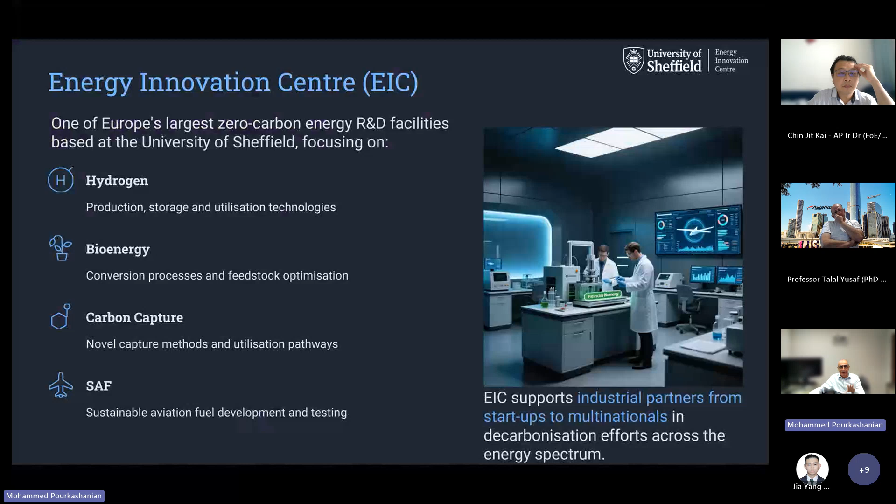What is the Energy Innovation Centre focused on? Rather than showing this diagram in order to meet my 15 minutes, let me tell you what we do. The pictures and photos show part of our activity and facilities. We have bioenergy facilities including waste to energy, biomass, and we also have a gasifier - a wooden gasifier. These are at pilot scale level.

We have a biogas turbine that works with biogas or hydrogen. We also have a marine engine that operates with bioenergy, as well as combustion test facilities operating with hydrogen, normal fuel, and even biogas.

In addition, we have carbon capture technologies involved, next generation technology like a molten carbonate fuel cell, amine capture plant, rotating packed bed, as well as direct air capture. Overall, we capture around 2.5 tons per day of CO2 when a few of these items work together.

Plus we also produce hydrogen from an electrolyzer. As you can see, we have all the components for SAF production - SAF produced from CO2 and hydrogen, or from syngas and hydrogen, using a Fischer-Tropsch pilot plant, which produces around 200 liters a day.

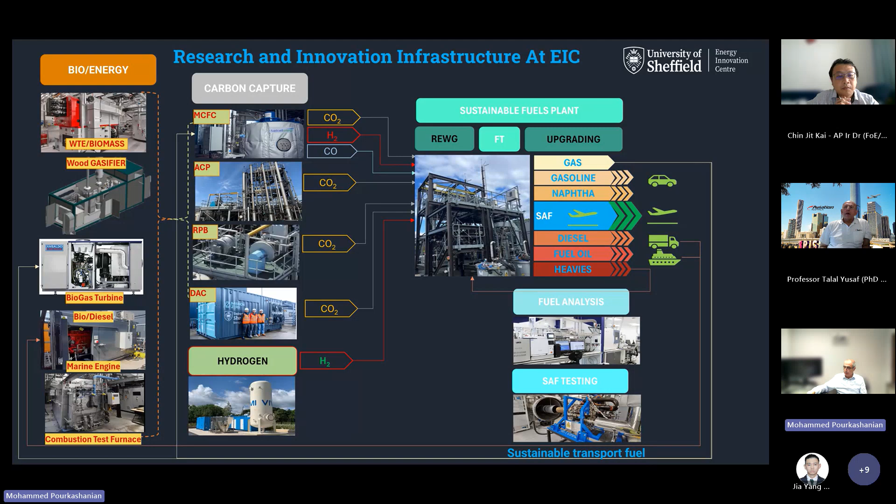Then the fuel produced from that goes into the fuel analysis lab, part of our contribution to the UK SAF clearinghouse. We also have an aircraft engine, an APU engine, where we test the performance of these fuels. This is our next generation technology that has received funding.

It reduces the cost of hydrogen, the SAF production, by around 40% using this technology. We will provide more information on this if there are any questions.

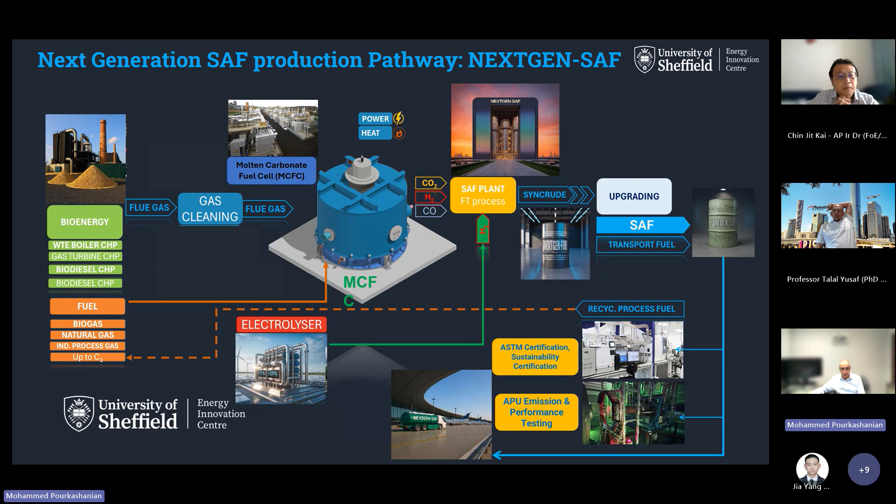Our work with industry - we work very closely with industry. We did all the tests for Flight 100. You may know about this flight - it took off from London to New York in 2023, November 2023.

We used 100% SAF in both engines and looked at the performance of the engine. Some of the results obtained from that are shown here. We tested that fuel in our lab using laser diagnostic facilities, and what is interesting to see is the output, shown on the left-hand side of the picture, of the particulate emissions.

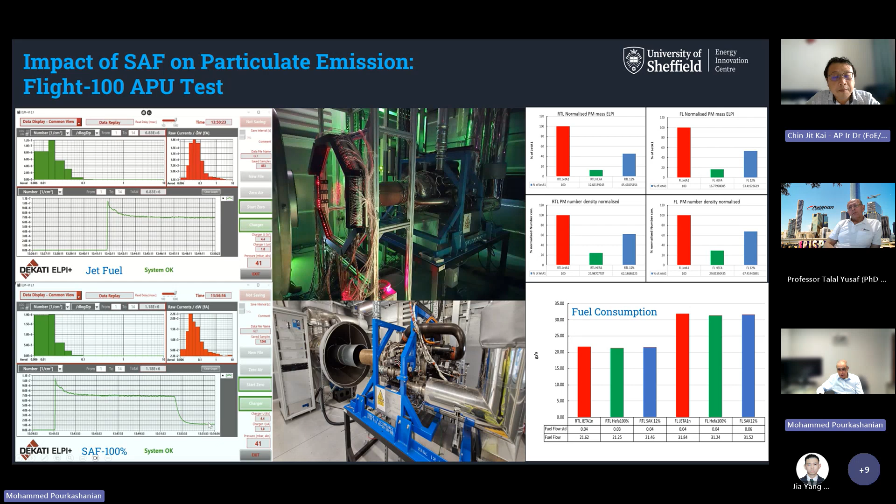And if you look at the bottom section of the jet fuel system, you can see that emissions generated from conventional aviation fuel, when we introduced SAF, show a significant drop, around 70% by mass or 40% by particle number density, a significant reduction when SAF was introduced.

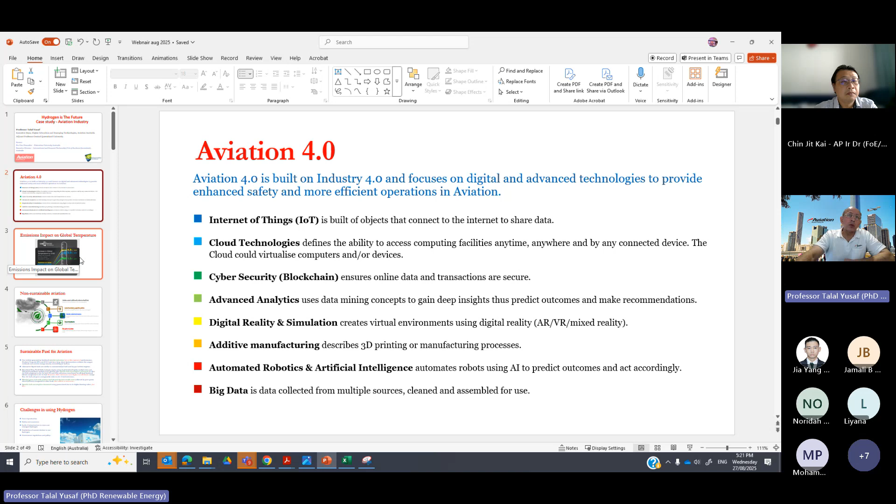We have a nice project to share with colleagues here, and this project is on hydrogen for the aviation industry. To me, hydrogen is the most ideal alternative fuel for aviation, besides SAF of course, because it contributes to reducing emissions significantly. As we all know, H2 plus O2 gives you H2O. Temperature is increasing and we need solutions, of course.

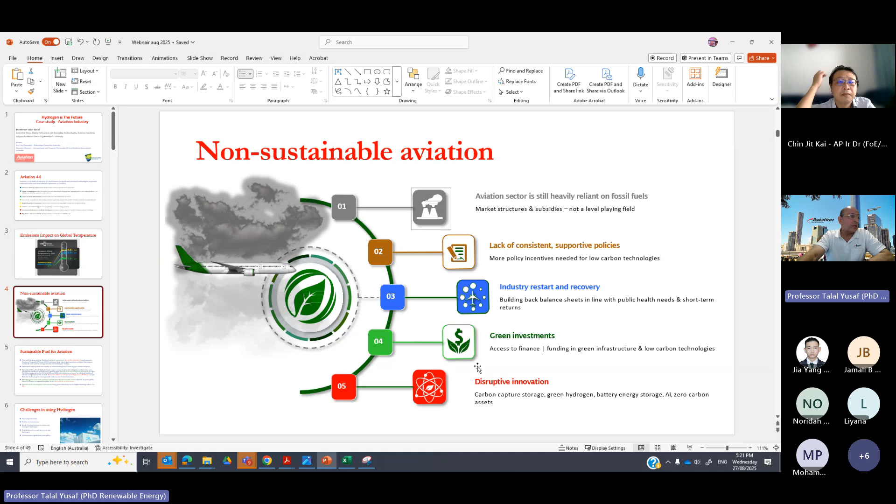I also wanted to share with you the generations 1, 2, 3, 4 of the aviation industry, and where we're at now with Aviation 4.0. I've done work for my government about Aviation 4.0 and where we're at using the technology.

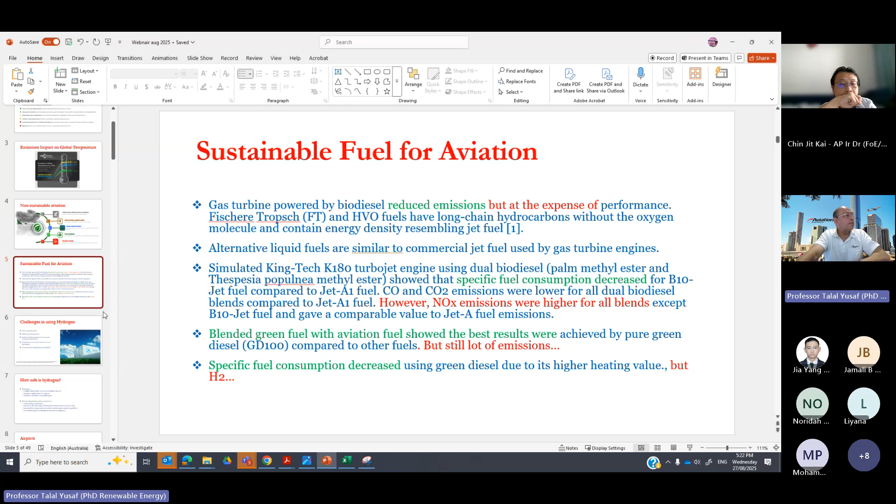Sustainable fuel and sustainable aviation, or SAF, has plus and minus, as everyone knows. I'll quote here a statement from my PhD student: we're solving the problem, but we still produce a little bit of oxides of nitrogen, CO, and CO2, and so on. So with liquid fuel, I think we still produce a little bit of exhaust gas emissions that need to be addressed.

Because of that, I have a very young, strong team who are not academic at all - they're all engineers and pilots. They come and speak to me, I give them a hangar and one aircraft, and they start converting this aircraft to use hydrogen.

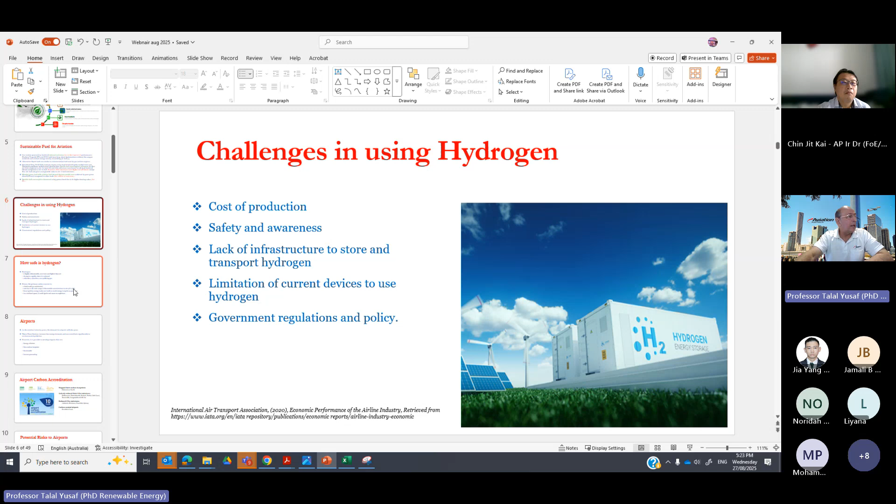So if I combine these together, we all need to work together, as mentioned previously, to tackle this problem and complement each other. The question is: is hydrogen safe or not? Again, everything is not safe when we started, but it becomes safe when it's up and running. That's why I feel hydrogen is safe. But we need to convince the regulators - we need to convince EASA, CASA, and CAA of Malaysia to tell them it is safe. Many reasons.

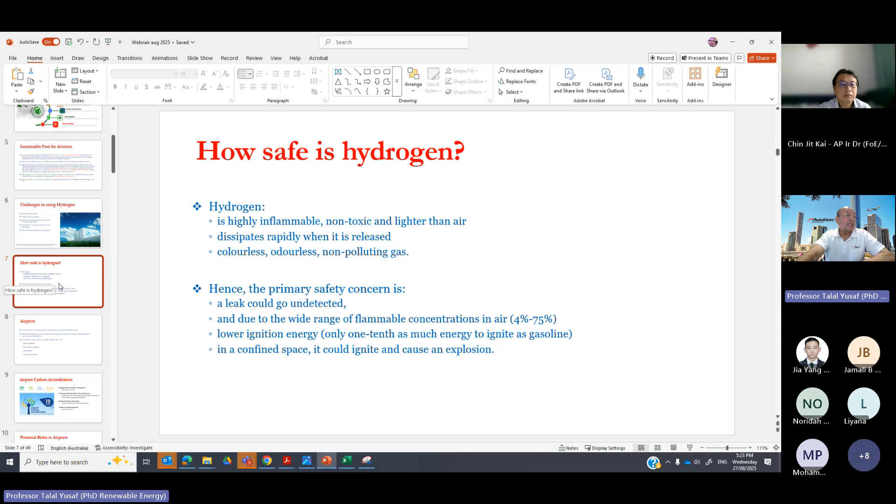I don't want to go through the technicality. Where we're at, Aviation Australia, and Australia in general, we use alternative or renewable energy resources for the airport. We have a few buses that operate on hydrogen, and we are also now producing green hydrogen.

By the way, I'm sure you know Australia produces a lot of brown hydrogen from coal and gray hydrogen from methane. But now I'm talking about green hydrogen - that's why it is expensive.

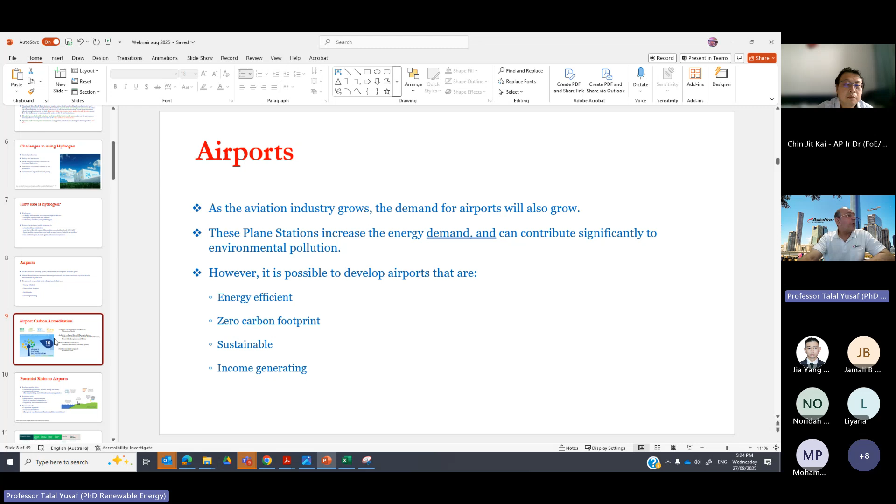Example: Adelaide Airport is now almost - they do a lot of decarbonization - but almost reaching the level where they reduce the emission dramatically.

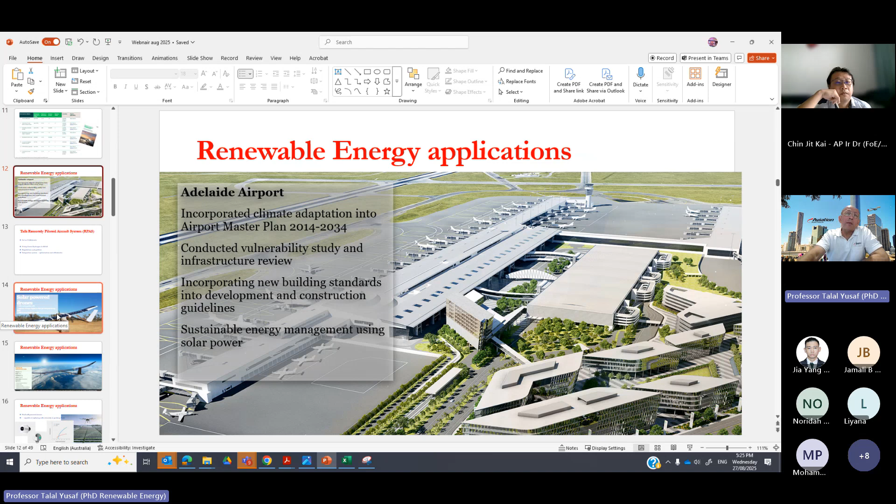Another area where Aviation Australia - we are about 25% of our business located in drone and drone technology. We train students and defense, and I think this year we've done, not me, Ryan, about 1,500 students, and we're certified by, we're licensed by the Queensland government, so we sign on behalf of the government.

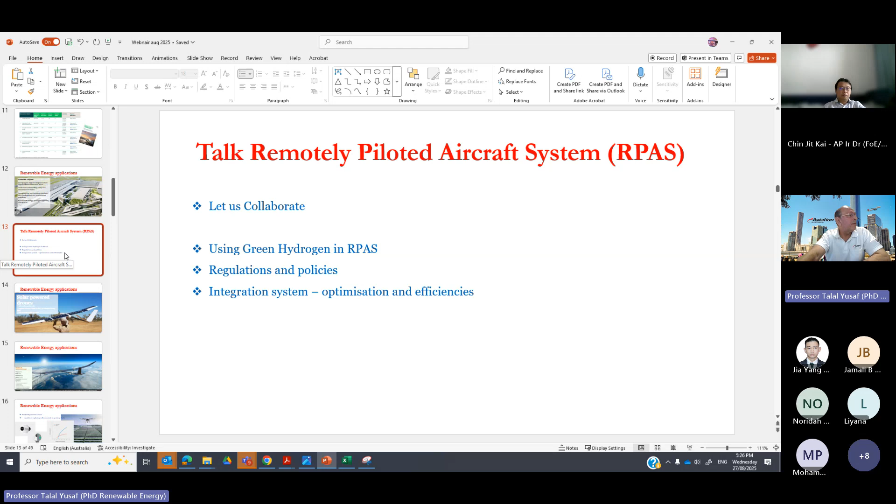We have about 5,500 students in Saudi as well, and in Malaysia we also have a very strong link. So again, since the drone is...

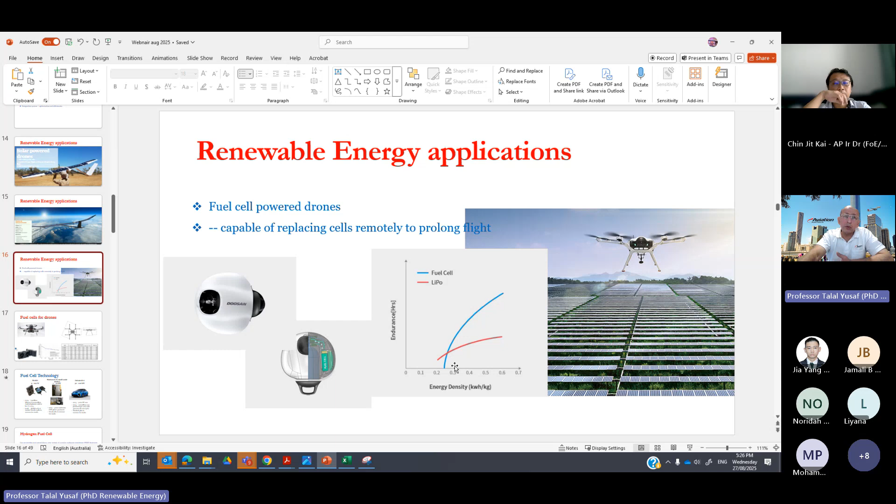Part of our business, Ryan and I decided to play with one drone and say, how about we convert this drone into hydrogen? As you can see, the blue color is the fuel cell, and it gives you a lot of endurance and also payload. So we demonstrate this to school students and universities. Some technical information about the drone is available here.

What is the source of green hydrogen, or what is the technology? The technology is electrolyzer, very basic. I've just had some discussion before this webinar, and I've been asked the question about whether we are going to produce green hydrogen, and the answer is we can buy electrolyzers from well-advanced countries who specialize in this, such as Japan, Germany, etc., instead of wasting our time.

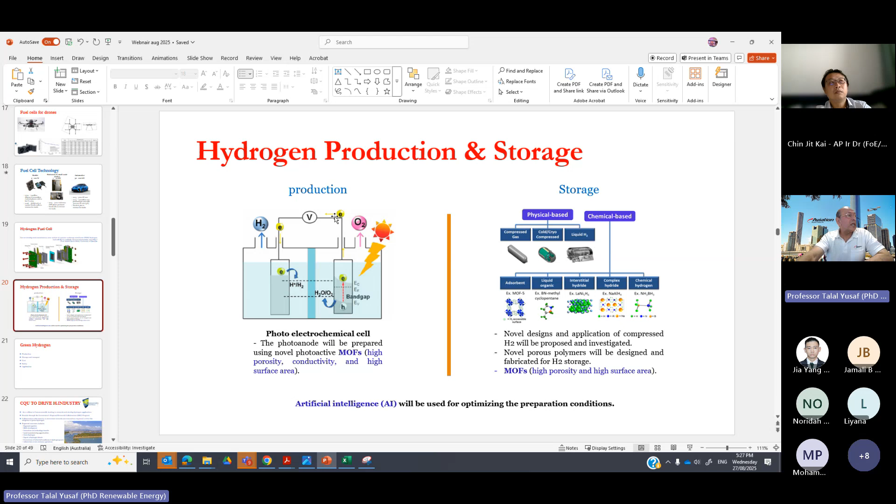And we're selling LNG and CNG to Japan, South Korea, and Taiwan. Now we're working - CQ, my university, Central Queensland - with the investor who's Andrew Forrest, a multi-millionaire, to pump 30% of the gas to be hydrogen. Again, this is something happening at CQU.

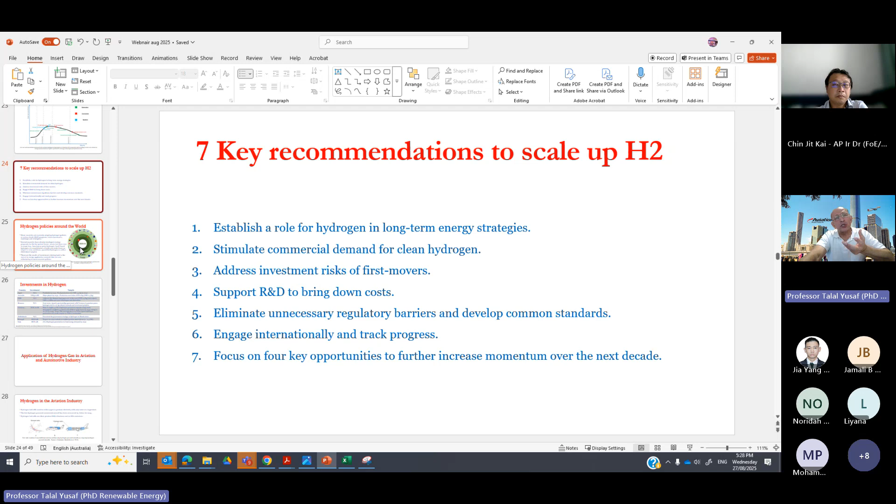I think the recommendation for hydrogen is we need to think long term. We need to do a little bit of commercial work, which is again something we are doing now - the risk of first mover, support R&D, and many other things. But in general, I think we really need to build awareness, and we need government support, which is happening so far in Australia. Of course, developing the technology, and we need to also graduate technologists who can deal with the technology.

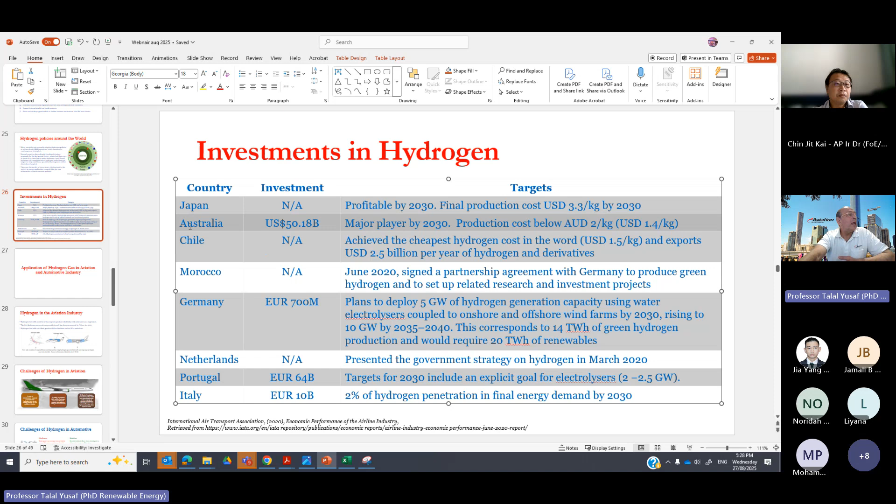The cost is high - we need to make it low. And here is the Australia cost of green hydrogen.

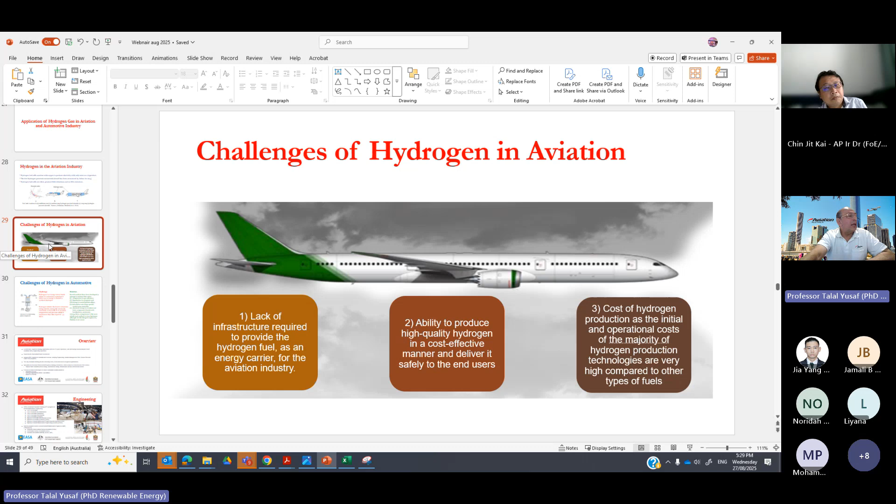We are now converting one aircraft, a Beech 1900, to use hydrogen as a fuel. We removed the gas turbine, and now we're doing a fuel cell, and it is happening. I will show you some photos at the last slide of this presentation.

We talk about challenges. This is my organization, and as I said, 4,000 strong. We graduate many maintenance engineers. We're part of CASA and EASA. We've got about a dozen aircraft, so we are very handy when it comes to aircraft, and we do a lot of certification, and sometimes it's important to think of certificates.

One of those short courses is hydrogen and hydrogen safety. The very last bit of this presentation is Stralis. Stralis is a commercial company led by Bob. Bob came to me 3-4 years ago, and we started discussing whether we could convert this aircraft to use hydrogen, and I was very supportive.

We gave him a hangar and a small jet, and they started playing with the aircraft and making a lot of progress, collecting donations, and now they are actually more than 50 staff members. They started with just a few, and now we have aircraft already operating on hydrogen, not yet flying.

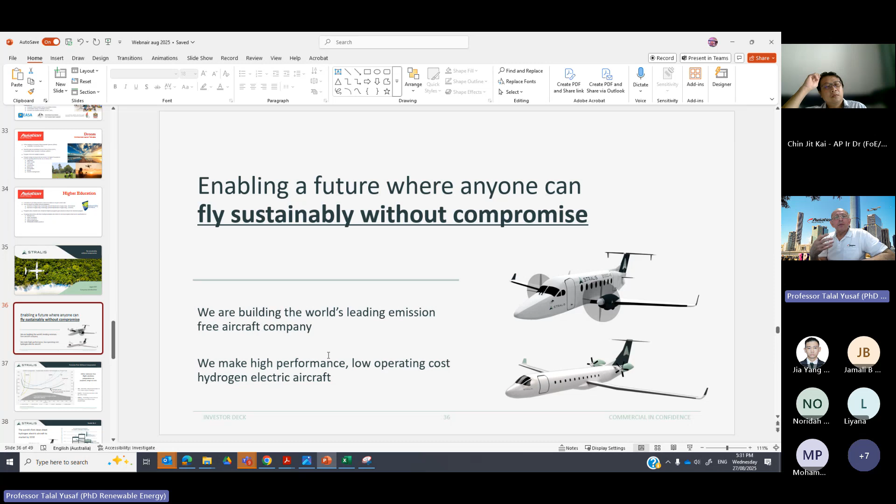Hopefully in 2026 we'll start the first trip from Brisbane to Gladstone, which is about 400 kilometers. Now they are very commercial, and that's why they wanted to produce the first aircraft by 2032, and it will be on the market.

And that's why, yep. Prof Talal, 9 minutes. Sorry? Sure. 9 minutes. Yeah, yep, but I think we still have time. Don't finish earlier. Yeah, okay, I'm trying to finish earlier, but anyway.

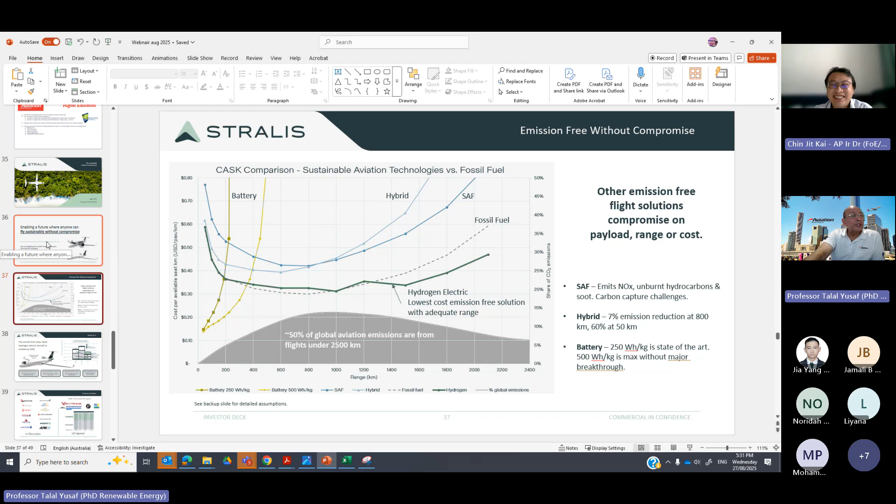So, in this case, I just wanted to talk about drones, if I have some time, because drones are another emerging technology device, and we're really doing a lot of work in drones, RPAS.

We're using this drone technology, but we realize we need longer durability, we need zero emission, and we need higher payload. That's why we start thinking seriously of converting this drone into hydrogen. This will also definitely contribute to building awareness in our kids, our students.

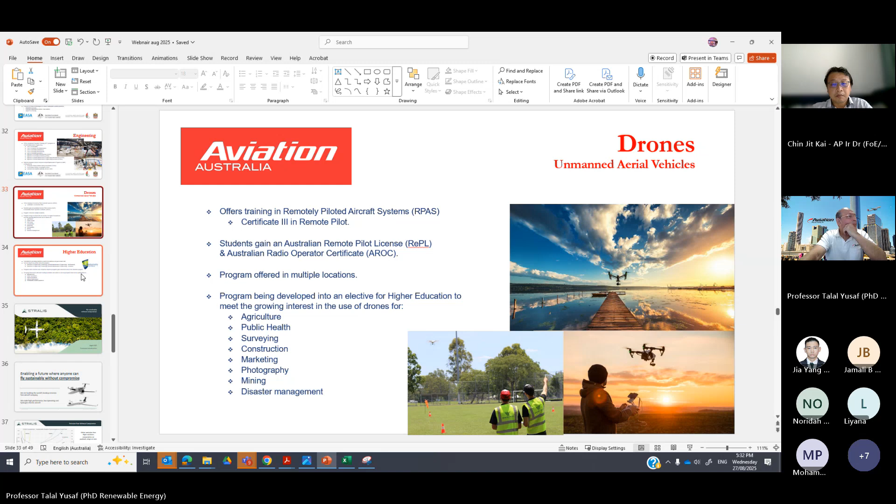For CQ and Aviation Australia, we partner together and we start developing what I called it when I presented this to the government. I said, now we graduate many technicians who can change the nozzle and jet and tire and all these things, and we call them B1, B2, A1, A2—these are maintenance technicians.

But with the new technology, we are now aiming to graduate what we call technologists. These technologists are not professional engineers—not 4 years, too much—but not also just 2 years. This is what we are aiming to do and achieve.

We successfully have 2 classrooms now, and hopefully we'll start graduating the first batch of students. Those students will be able to deal with the new technology, including hydrogen.

Stralis signed with a Japanese company last month to do more work, and Aviation Australia always comes to do the training. So we are going to train and graduate technologists who can deal with this technology, which is another important element we need to achieve.

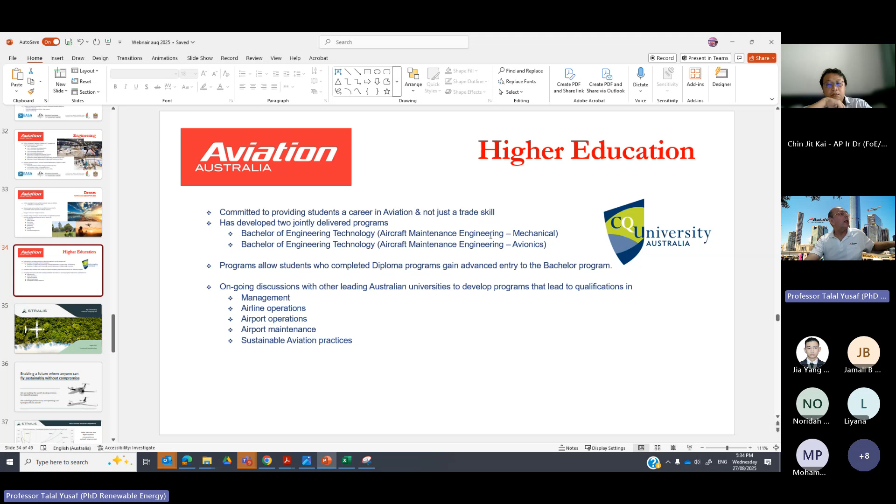Now, this is Stralis, and as I said, I really love them. They are very young, energetic guys—no PhD, no master's needed—they straight away jump to the aircraft and start making the conversion. They are very, very successful. They've been in the business for almost 4 years.

Hopefully by 2030, they want to do the first clean sheet hydrogen electrical aircraft, and they want to push it to the market. They've signed agreements with Qantas, Virgin, and Emirates, and so on and so forth.

Some technical information, which I don't want to spend more time on, but this is the target, and the sale—they're aiming for some sales of $1.3 billion by 2032. This is for 9 to 19 passenger Beech 1900 aircraft, but over time this will increase.

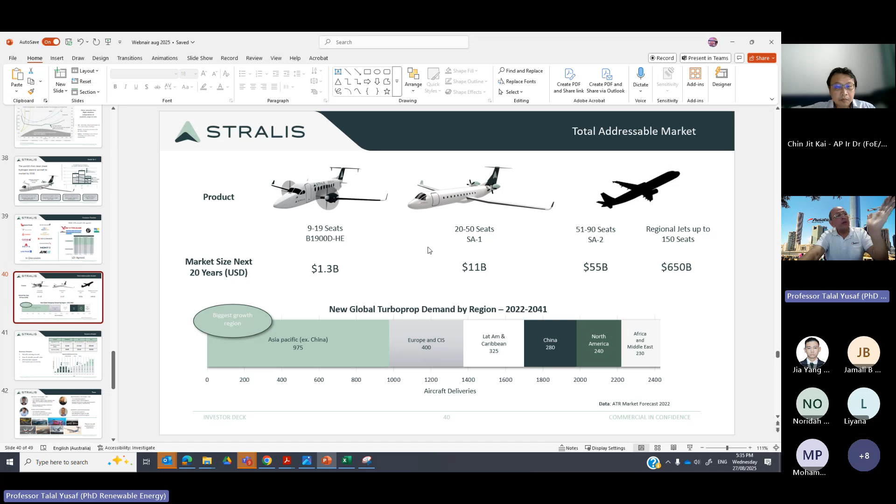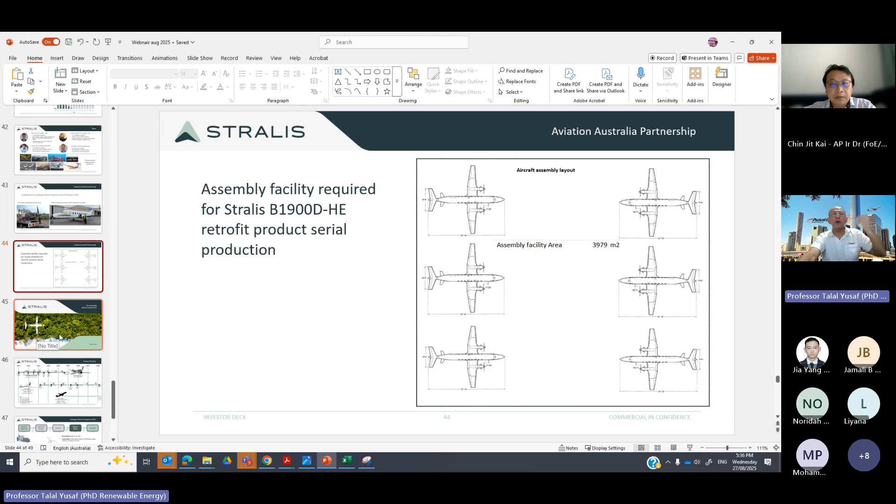I think with this I will stop, and I will open the floor if there's any discussion, or we wait for the following speaker. Thank you very much, colleagues.

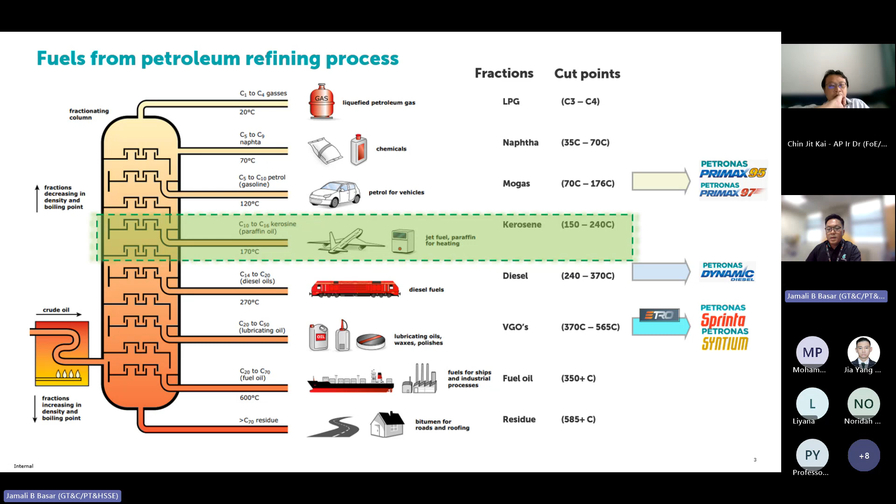So first, what is SAF? SAF is a sustainable aviation fuel, an alternative fuel made from non-petroleum feedstock, which based on our study can reduce up to 80% of the emission. And it is a drop-in fuel, because when we design SAF it should be compatible with the existing engine, so based on our pathways we can simply blend and drop in with the fuel.

Studies show that we can blend up to 50%. At the moment there are about 11 approved SAF pathways. There are two different versions: one is ASTM D7566, and another one is D1655. Later on I'll show you the difference.

So what is CORSIA? CORSIA simply means Carbon Offsetting and Reduction Scheme for International Aviation. It is to address carbon neutral growth from 2020. Imagine if we do not have SAF - it's anticipated that our emission will continue to grow, since aviation contributes about 2% of emission to the world. This is where CORSIA addresses how to manage the emission.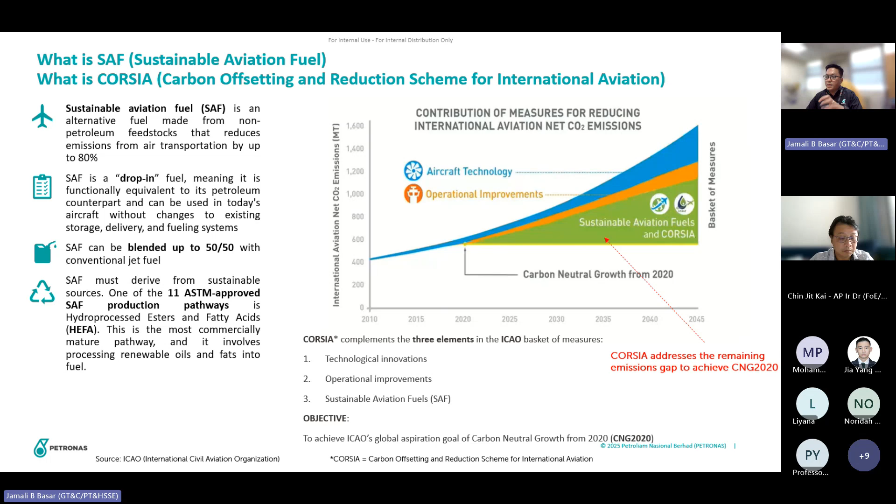As we move towards sustainability, as I said earlier, we have ground transport and also air transport. For ground transport we have electrification, so we expect the demand for gasoline may be a bit affected because of the rising trend of EVs, electric vehicles. But for aviation, we expect it to continue to grow.

This slide, the graph below, shows that the whole transportation industry collapsed during the pandemic. But after the pandemic, especially in the airline sector, we anticipate continued growth. We expect by 2025 or 2026 we should be able to recover to the level we achieved before the pandemic. The chart on the right tells about the SAF projects across the globe.

You can see that Europe has the most number of projects, about 58 projects. But in terms of capacity at the moment, the US is still the biggest, about 24 million tons per year.

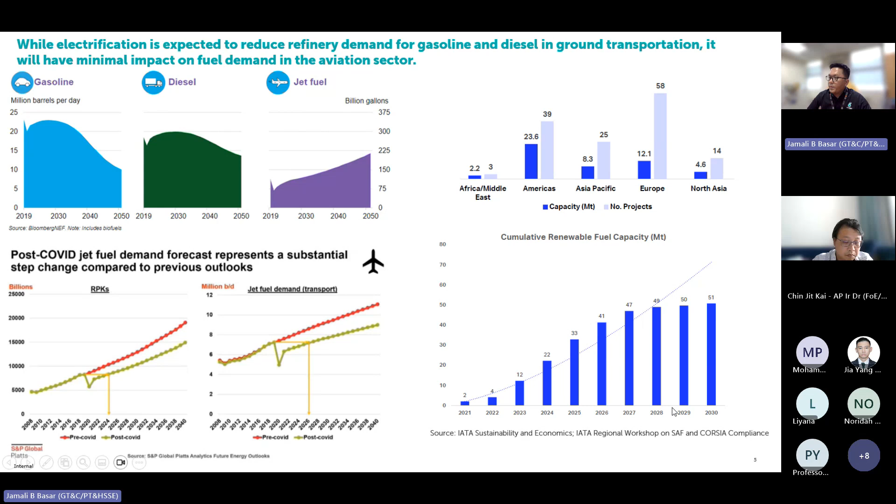Okay, next, what is a sustainable aviation fuel, which is SAF? So mainly the feedstock for use of SAF actually comes from waste feedstock. It can come from plant waste, used cooking oil, plastic waste, domestic waste, even algae, and also industrial waste can be used as our feedstock.

So the good thing about SAF basically is the CO2 that we use is absorbed by plants and then produces a waste, and then this waste we convert into SAF. The SAF then emits CO2, but over a lifetime, over time, this CO2 is what we call neutral. So this is where we foresee that SAF can be sustainable over a long time.

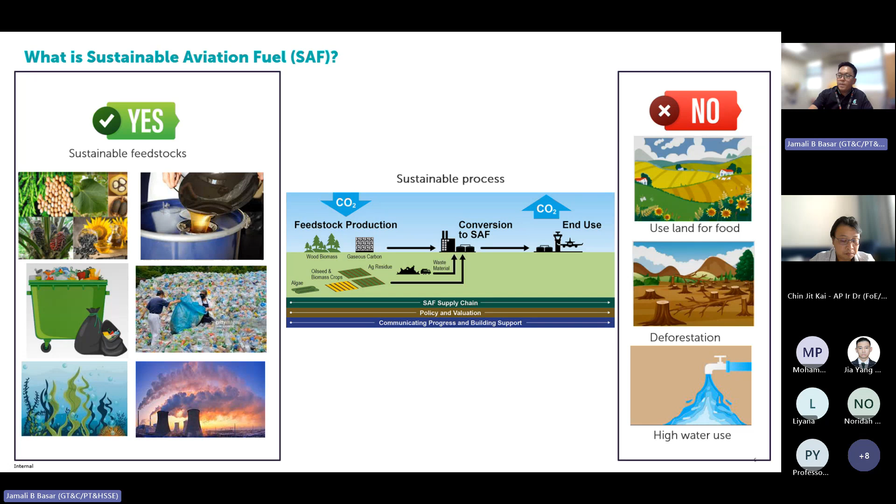So in order for us to do SAF, there is a standard or systematic approach to evaluate whether it can be SAF or not. According to ASTM D4054, this is the ASTM we use to evaluate how the SAF is made. So there are 3 different test programs.

The first one is what we call the test program, with 4 different tiers. The first is just to evaluate the critical properties of the SAF, whether it meets the typical jet fuel specification or not. Tier 2, fit for purpose, goes beyond that specification—we need to see the possible impact to the engine. If that is okay, then you go to the next tier, which is component or rig testing. Finally, tier 4 is where we need to test on the actual engine.

So in terms of fuel volume, for tier 1, it can be as low as 10 gallons. But as you go to higher tiers, the amount of fuel required is a lot more. Even for tier 4, it can be as high as 100,000 gallons, basically to test across the engine.

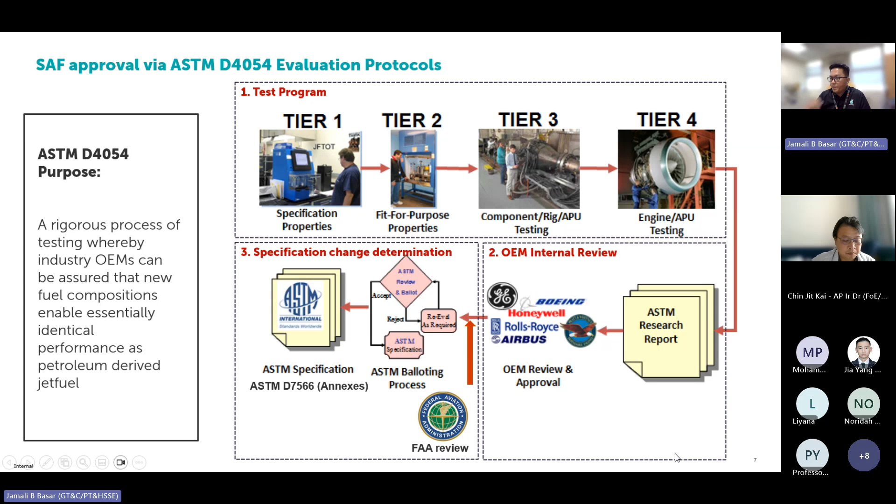Once you pass that program, you need to provide the report for OEM review. This is based on ASTM, and from there they will evaluate whether the one that you produce can meet the existing ASTM, which is ASTM D7566 or ASTM D1655, or it may require some new process which can be put under a new annex under this ASTM. After that, it completes the process.

So at the moment there are 11 pathways, but here I'll just show you 7 pathways under D7566. So basically from the right, the one that I talked about before is on the evaluation protocols, ASTM D4054. Once you meet that criteria, you need to see whether it can be mapped against the existing ASTM here, D7566. If it's a completely new process, it may be a new annex under this ASTM.

And for the remaining, basically for D1655, it tackles co-processing. Co-processing means whatever you have can simply be blended into the existing jet fuel for use.

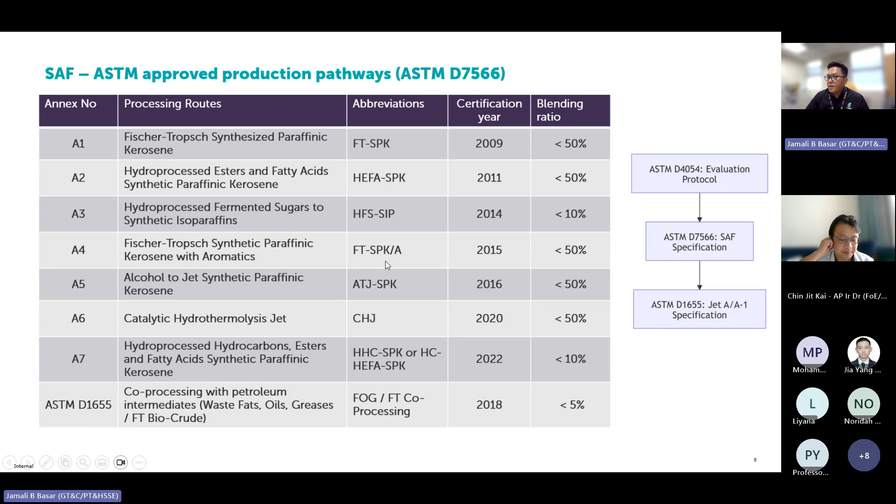Okay, so in general, this is the overall SAF processing route. In summary, as I said earlier, our feedstock has to come from waste. It can come from used cooking oil, animal fats which we call tallow, or from other waste. Depending on the feedstock, it will dictate how the process should be to make SAF. So in general, there are 3 categories.

The first one is through lipid conversion, where the lipid comes from UCO especially, and also animal fat. This is where we call the process HEFA, under A2. Then for biochemical, this tackles organic waste, where you convert it into sugar, then into alcohol, and finally into jet fuel.

So this is under the associated pathway called ATJ, alcohol to jet, under A5, and also A3. Or sometimes we call it SIP, for sugar to synthetic isoparaffin.

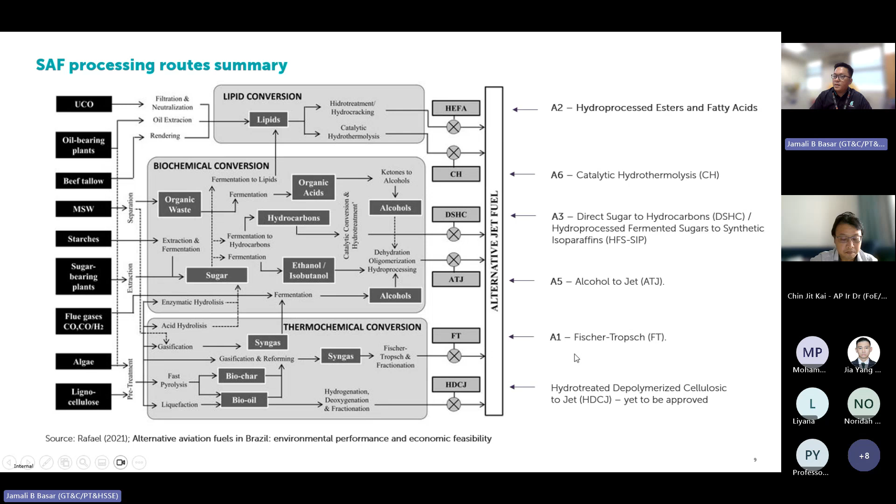So for jet fuel, this is a typical composition of jet fuel from the traditional process. In order for you to make SAF compatible with existing fuel, you need to make sure you have almost the same composition of that material. So you need to have paraffin.

Ideally, you need to have all of it - paraffin, isoparaffin, naphthene, and also aromatic. Aromatic is still quite important in fuel, basically for seal compatibility, for seal swelling.

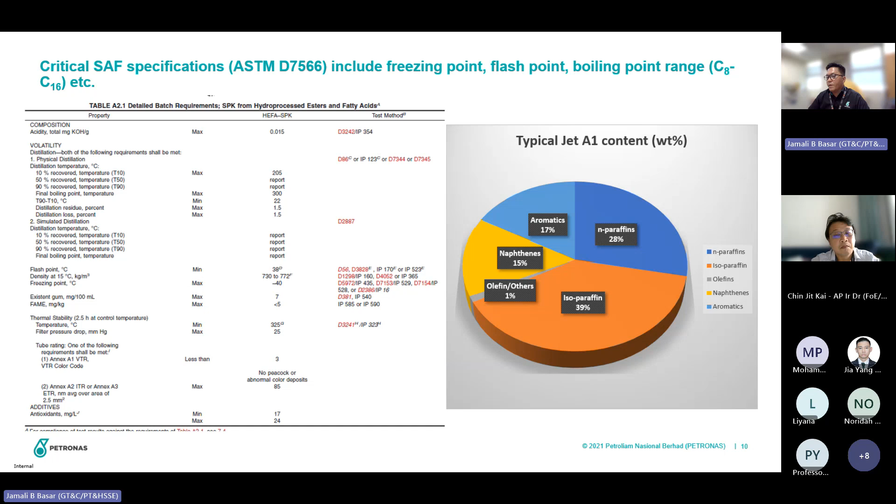So then I'll talk about CORSIA. At the moment we are in the first phase of the implementation. We are targeting by 2027, all participating countries will use CORSIA, will use SAF basically to address the emission.

In order to make sure that the SAF is compatible, the right method to confirm its sustainability is through a life cycle analysis. So in general, whatever you process, you need to calculate the LCA across the whole chain from feedstock cultivation all the way until fuel combustion, and calculate what is the emission. We need to benchmark with the normal jet fuel, which has about 89 CO2.

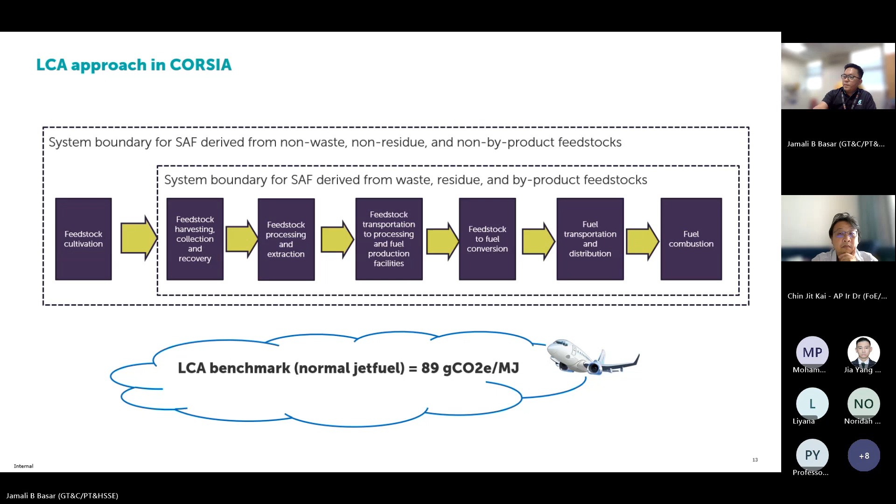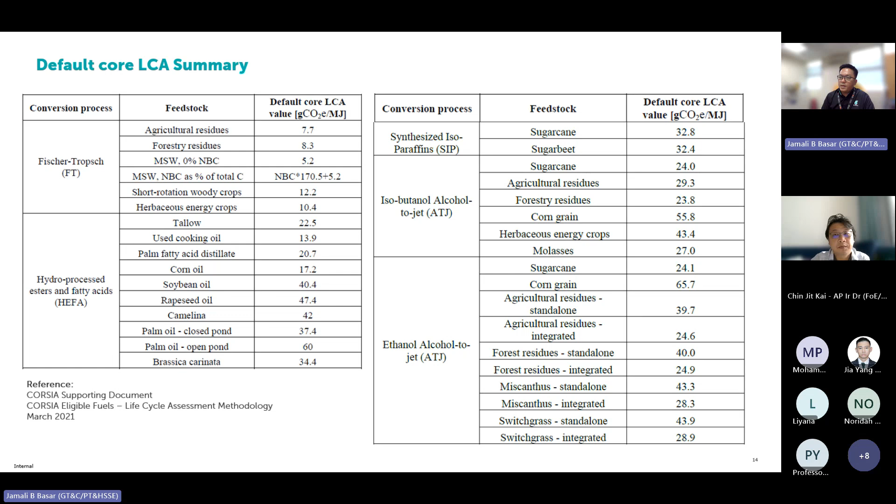Based on the approved pathways, these are the typical or default values for LCA. Once you have a new process, you need to validate this number, compare with this default value using the actual LCA method. Typically this needs to be verified with a third party, for example with ISCC.

Can you summarize in 1 minute? Okay, all right, okay, so in 1 minute.

Across the world, basically these are the projects that have already been announced, committing to produce SAF. My point here, if you can see the color, the most matured pathway is HEFA, the A2.

Even Petronas, we have already reached FID for our biorefinery. We target to be ready for commissioning in 2027, 2028. So hopefully soon Petronas will mark our own HEFA on this map as well.

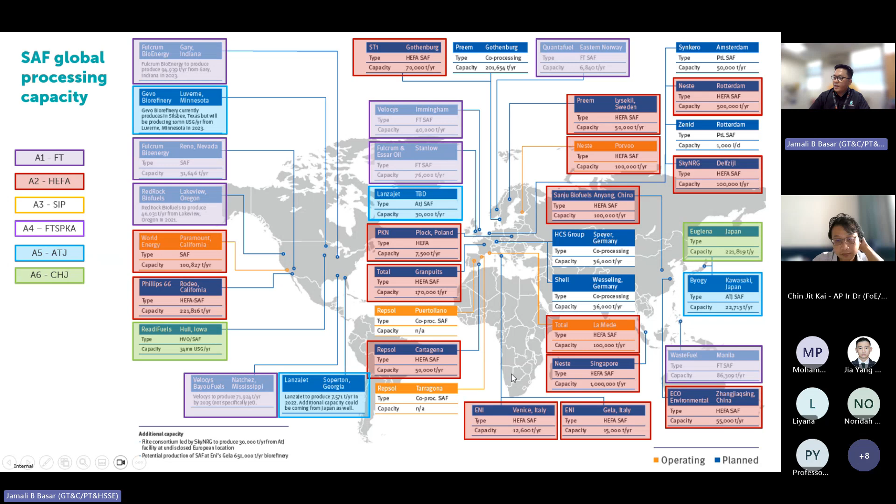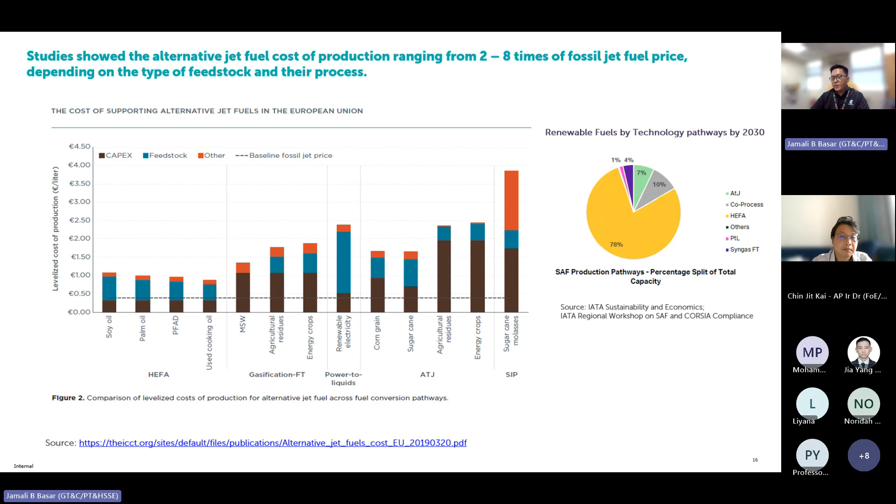In terms of this, it's more an estimated price based on the study because the process is quite complex, not straightforward. Based on HEFA itself, the current price is about 4 times that of jet fuel. So imagine if you have a more complicated process, it will complicate and make the process more expensive. That's one of the challenges for HEFA, for SAF.

So this is just what we are doing in Petronas, because in Malaysia we have good feedstock in terms of palm oil. So we focus on this pathway. Even the biorefinery in Johor later on, we anchor on this approach.

So in what we are doing in Petronas on the R&D side, we try to enhance one of the processes under HEFA, which we call hydrodeoxygenation.

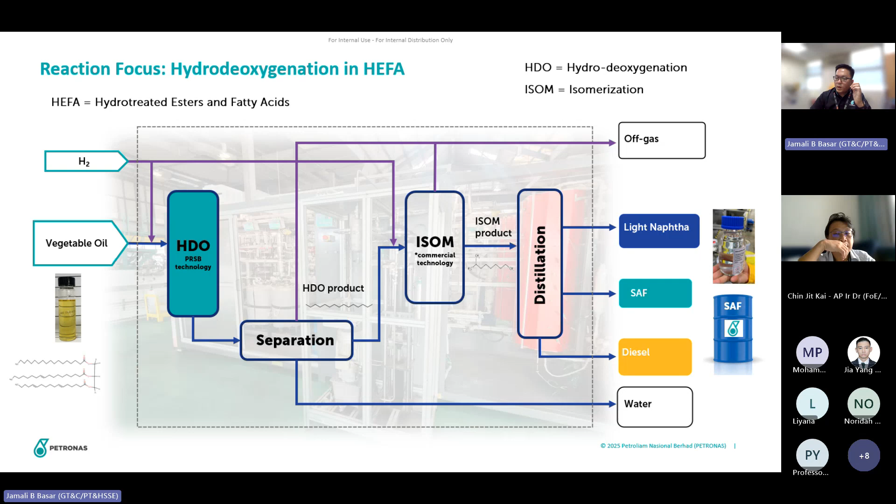So what we have demonstrated, basically we tested at different scales. First we did in the lab, then in a small rig using a 40 mil reactor catalyst, and then we further tested and validated at a much bigger catalyst reactor at 200 mil, and the most recent one we already demonstrated at a 1 liter reactor.

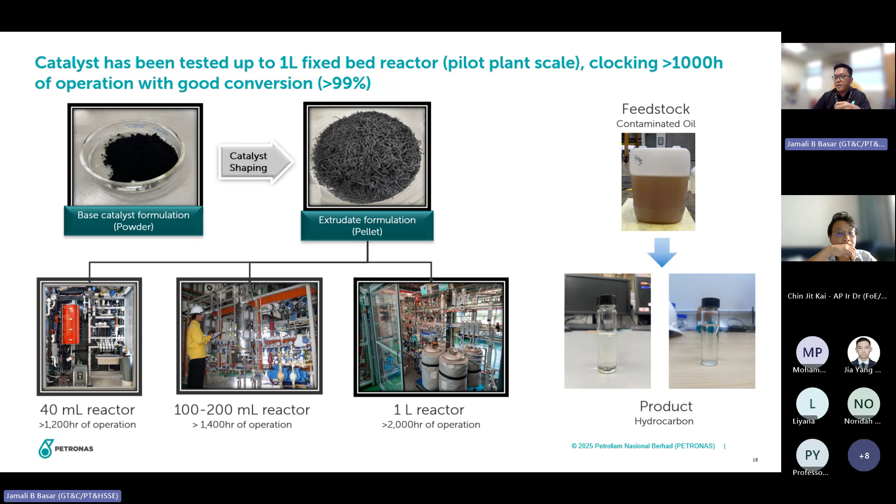So these are the pathways, these are the approaches of how we tested our catalyst and benchmarked it to the commercial one.

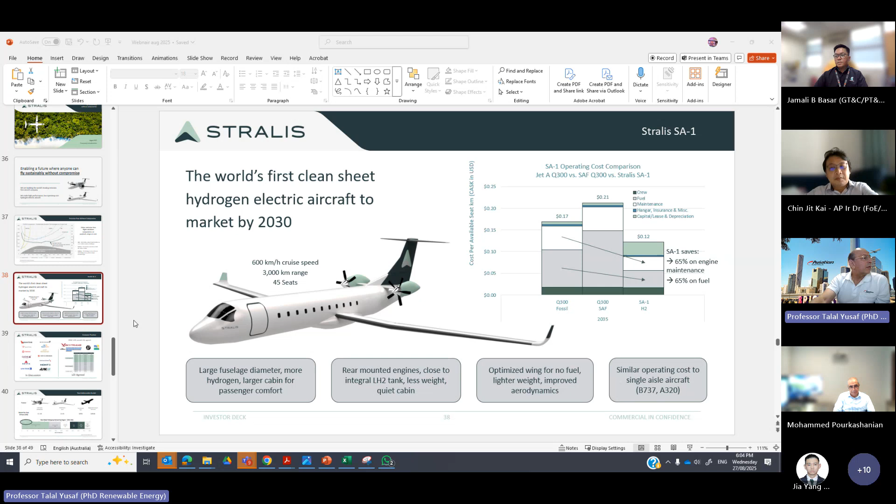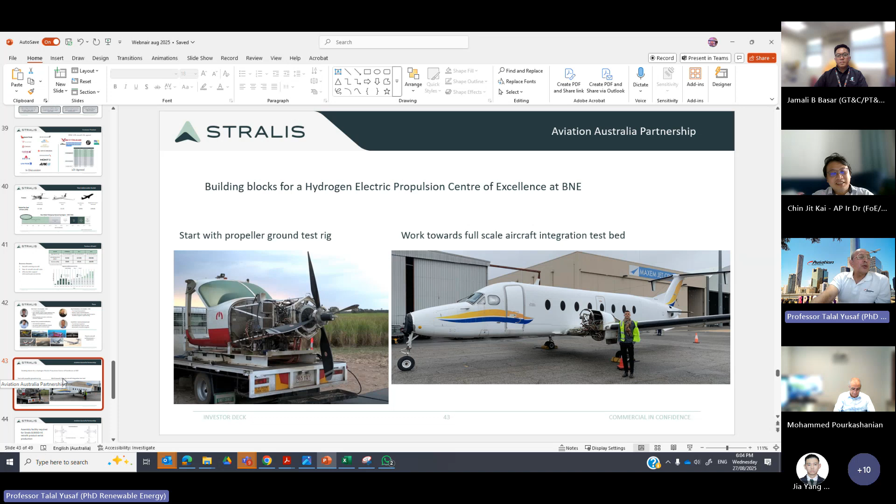I'm sure the team can talk more and more than what I say, because for me, I look at the bigger picture. I see them from time to time. I'm not heavily involved in the technical conversion, but I would say I'm very impressed.

So that's basically the new shape, and you are very right. Actually, that's why they call it clean sheet. So it will be one sheet, and that's it.

Just regarding what Professor Shenin said, I totally agree. Actually, one of the main challenges is the regulator, because now you can do anything you want, but if CASA or EASA are not cooperative, it's very difficult. Even with Malaysia, last year or beginning of this year, I visited CAAM, and they asked the same question that we received from our CASA here.

So I agree, infrastructure of SAF is less complicated than ours. But in Brisbane now we have a gas station pump for hydrogen, just for your information. I have some photos, but it's too late for me to show you.

Thank you. Okay, thanks. So, Engineer Jamali, also a very quick one. Certification seems like it's an issue, but how do you think this can actually impact business opportunities and things like this?